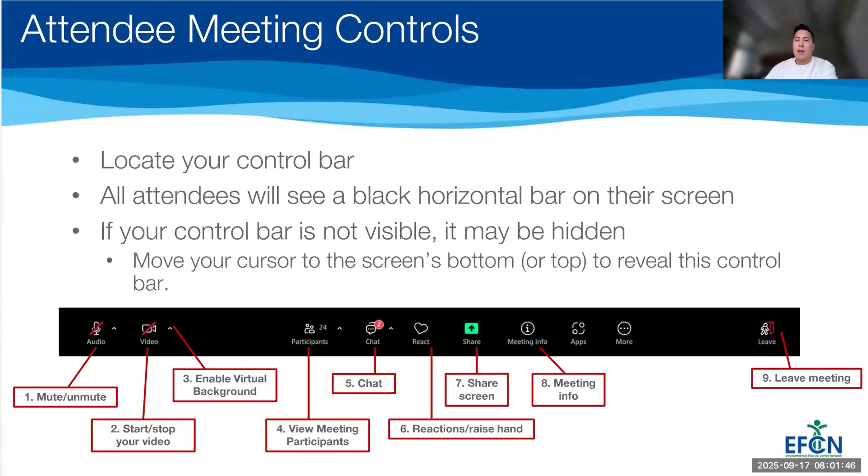These trainings are based on the Water Professionals International ABC operator certification. This is a pretty standard guide used to assess wastewater operators. Many of our topics are specifically aimed at helping you pass your wastewater operator level 1 and level 2 exams. If you want more information about this exam, it can be found on the Water Professionals International website, under the wastewater operator section.

To answer that question, here's a broken manhole. The first answer is that, like with any wastewater infrastructure, as use goes on, that infrastructure tends to degrade over time. It wears away, things get old, things break, parts get lost, and so on.

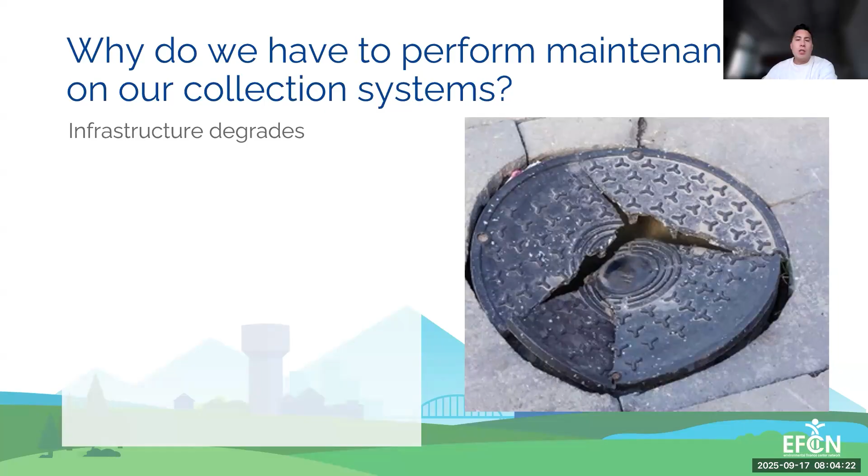But also, specific to our collection system, many users treat the things they flush down the drain as out of sight, out of mind. People don't really think about what they flush. We've seen wipes, trash put down toilets, rags put down toilets—all kinds of things.

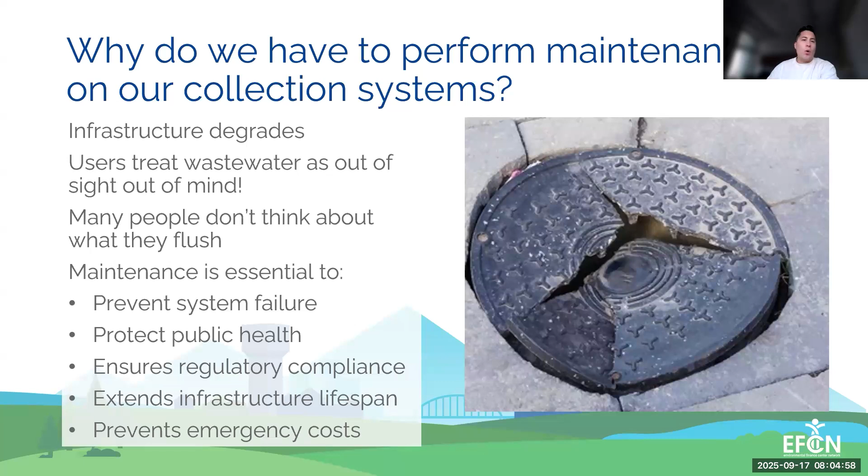Because of this, our collection systems need constant attention—both preventative and corrective maintenance. All of these are required to make sure our collection systems do not fail. They ensure we do not have overflows and that we protect public health. Maintenance also ensures we meet our regulatory requirements and are not violating based on overflows or a lack of maintenance.

Maintenance also helps extend the life of the infrastructure that we build and that our users pay a lot of money to access. And if we have good, strong maintenance schedules, we can prevent unnecessary emergency costs. Emergency costs are going to come up no matter what; however, a good maintenance program can prevent excessive and unnecessary emergency costs.

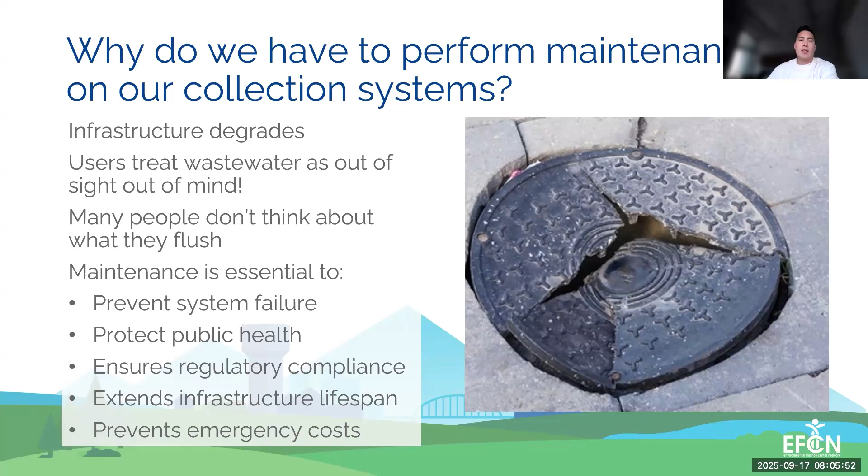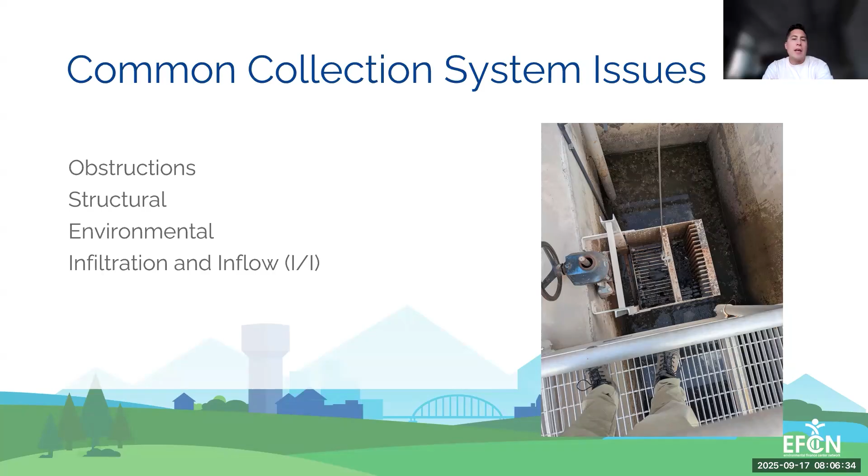So the first thing I want to talk about is some categories of the most common collection system issues. These are the ones that maintenance target, and we consider 4 categories: obstructions, structural issues, environmental issues, and infiltration and inflow. Now, these categories can intersect, and infiltration and inflow is typically a result of the others. But in our next couple of slides, we'll go into more detail of what each of these are specifically, what they are in a vacuum, and then what problems can result from these issues if they are left unaddressed.

So the first thing I want to talk about is obstructions, and for this slide specifically debris, because there are a couple different kinds of obstructions that we take into account. Debris can be incidental, because sometimes our users treat the wastewater system as out of sight, out of mind, or more commonly like a trash can. The mindset is, anything that goes down there belongs down there and it's gone for good. So debris is classified as any unwanted solid material that enters the wastewater collection system and can obstruct or impair the flow.

Examples of this would be trash, which would be rags, wipes, which are marketed as flushable, but they're not, and so that's why rags and wipes are kind of notable. Plastic, rubber, paper, that kind of typical trash products. Everybody I know who works in wastewater knows there's tons of rags in the system, but I've never quite found anyone who knows how they get there exactly. But they're always there. That shows the ubiquitous, omnipresence of trash in the collection system, because for some reason stuff always gets in there.

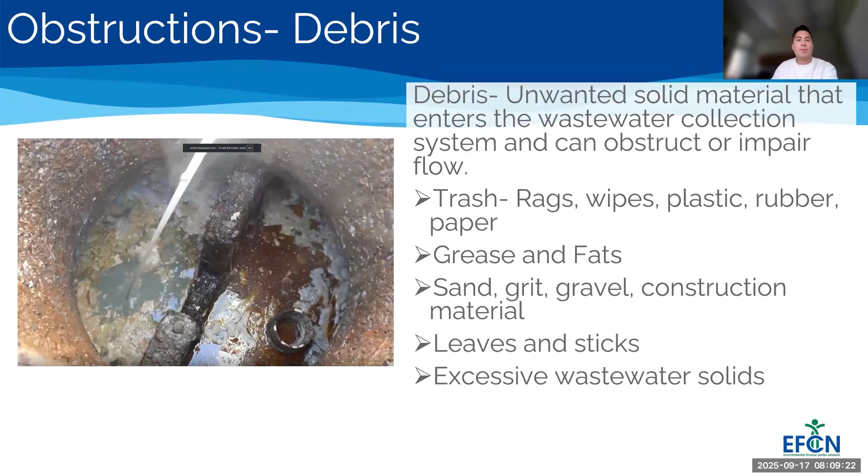Now, the second obstruction I want to talk about are root intrusions. Root intrusions happen when tree or other types of plant roots grow into the pipes of a collection system. Roots enter through small openings, such as cracks, broken joints, or poorly sealed connections. Now, just the basic biology of roots is that roots tend to, and why they become such a problem, and why they're ever present in our collection system, is that roots tend to gravitate towards weak spots in the pipe that are either already leaking,

or they have condensation, so those plants naturally seek out that water and collection system infrastructure, making it the perfect target for that behavior where they're seeking them out due to those leaks and condensation. Now, once they breach that infrastructure, they can grow quickly, because the environment is moist and full of nutrients. As they grow and expand, that can make those issues of them growing in the system worse, and they can even act as sites for other debris to cling onto and accumulate.

Now, roots are more likely in certain conditions. This is typically going to be such as old and deteriorating pipes, which are more likely to have existing cracks and joint failures. There's also clay and concrete pipes, which are more likely to have weak points that are more susceptible to root penetrations than more modern pipes, such as PVC and HDPE. And then one more is dry soils. Typically, those dry soil conditions can cause plant roots to grow more aggressively in order to locate moisture as well.

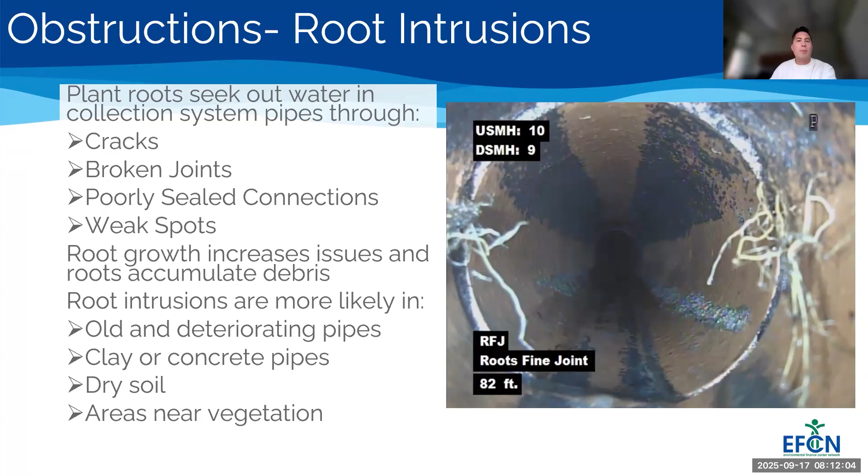So those are the two kind of obstructions that we're going to talk about. Now, the issues that they can cause—both obstructions are a concern because they can cause a range of different operational and environmental issues.

Obstructions can cause blockages and backups, which are known as sanitary sewer overflows.

Debris specifically is known to cause pump damage, as those solids, like the grit, rock, and pieces of trash that are really sturdy, can damage impellers or clog pumps, which can lead to mechanical failures and costly repairs in the system.

Now, both debris and root structures can lead to reduced flow capacity, as obstructions in the system tend to narrow the pipe diameter, which can reduce the hydraulic capacity, increasing the risk that those pipe sections can have overflows during peak flows.

Also, frequent obstructions can lead to increased maintenance costs due to the frequent need for cleaning, jetting, and emergency responses, which can drive up operational costs.

And then the final issue with obstructions is broken pipes. This is mainly due to roots, which grow in there, and as they grow, they make those cracks wider and cause collapses and stuff like that.

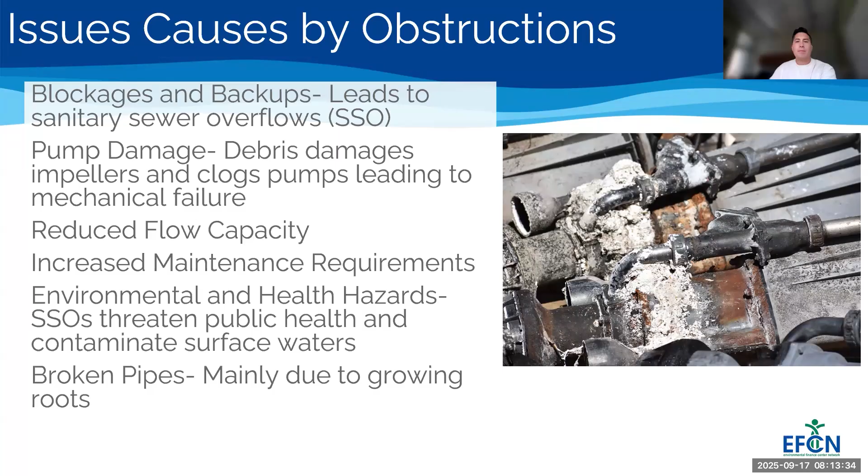So how do we address those obstructions? A lot of times this is done through routine cleaning—things like hydrojetting, where high pressure water is used to clean out debris; mechanical rodding, where you have a rotating cable with cutting tools that can scrape and remove buildup; and vacuum trucks, which can be used to suck out debris from those manholes and basins where obstructions collect.

Then another way of addressing obstructions is frequent inspections. You can use closed circuit television, or CCTV, cameras that you send through the pipes to locate and assess blockages to create more direct cleaning. This type of inspection can help determine if cleaning or repairs are needed.

Then there's also public education. If you inform your users about some of the dangers of blocking the sewer system, that can possibly help reduce the flushing of non-biodegradable items or improper grease disposal as well.

Now, specifically to address root intrusions, you use things like mechanical removal, where you use root cutters attached to rodding machines or jetters that are physically designed to cut and remove roots.

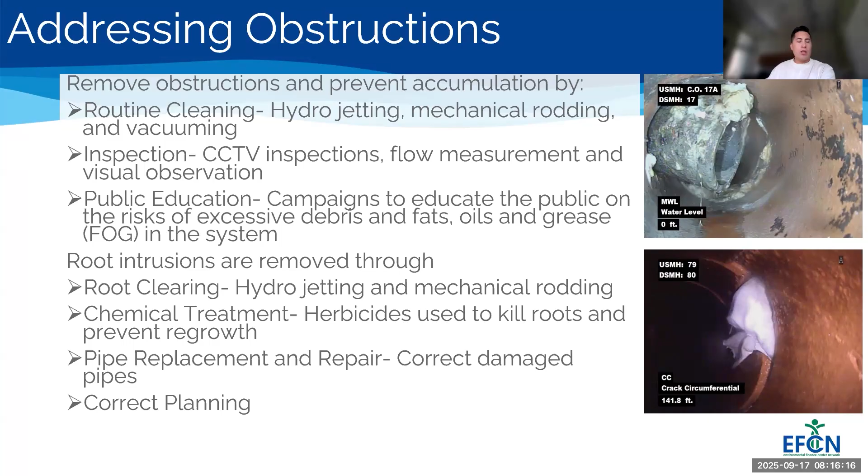Now, the next issue that we run into a lot in our collection systems are structural issues. Structural issues in sewer systems are problems that affect the physical integrity of the pipes and related infrastructure. Just like obstructions, these issues can lead to system failures, environmental hazards, and costly repairs.

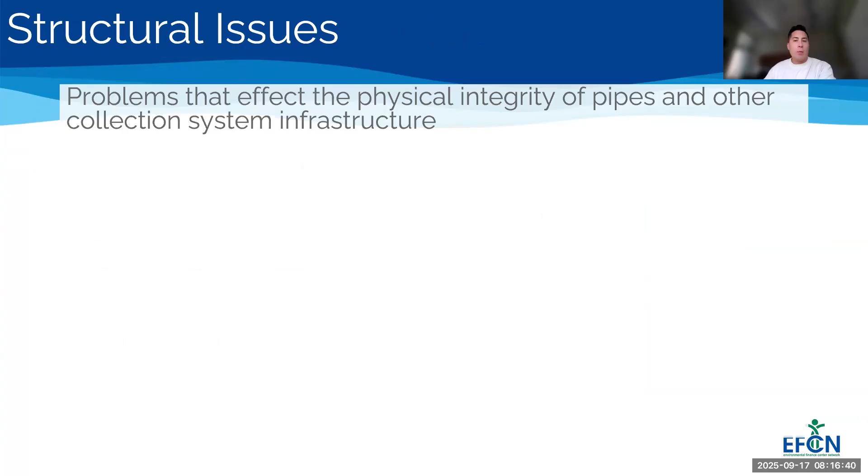Some examples of these include cracked or broken pipes, which develop due to age, ground movement, external loads like traffic, freezing and thawing during seasonal changes, or root intrusions. Cracked pipes tend to allow infiltration of groundwater or exfiltration of sewage, which can lead to environmental contamination and reduced pipe capacity.

Then the next type of structural issue is collapsed lines. These are essentially the advanced forms of cracked and broken sections of pipes. A complete or partial line collapse can result in increased flow obstructions and even complete blockages.

Another similar type of structural issue is deformed pipes. These consist of deformities that change the original shape and size of sewer pipes, like buckling, bulging, or swelling, which can be caused by improper installation, shifting soils, excessive surface loads, and environmental factors like thermal expansion—again, that seasonal change.

Obstructions like root intrusions tend to aggravate deformities found in pipes. One specific type of deformed pipe we run into a lot is line sags, which create low points in sewer lines. They create a perfect storm of issues where you have hydraulic problems due to backups, areas where debris can accumulate and slow down flow, and these come together to cause overflows.

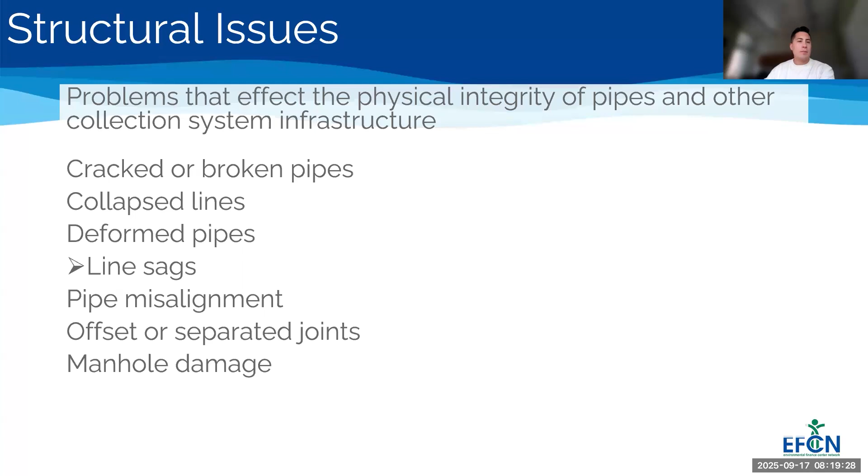This is specifically what one of those types of issues might look like, a pipe sag. As you can see, it's kind of a dip in the ground where water settles and debris settles as well. This has to be cleaned or else it can get worse.

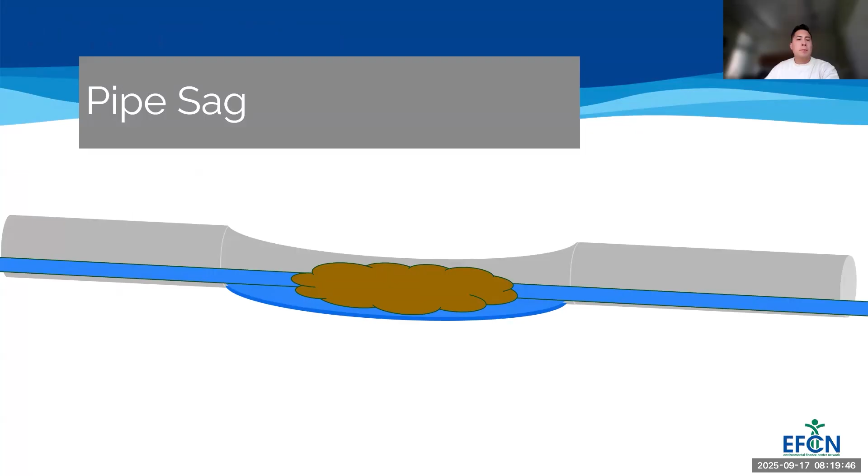The next type of issue will be environmental issues. Environmental issues in the sewer system consist of chemical and biological issues that are typically the result of untreated waste or poorly managed sewer systems.

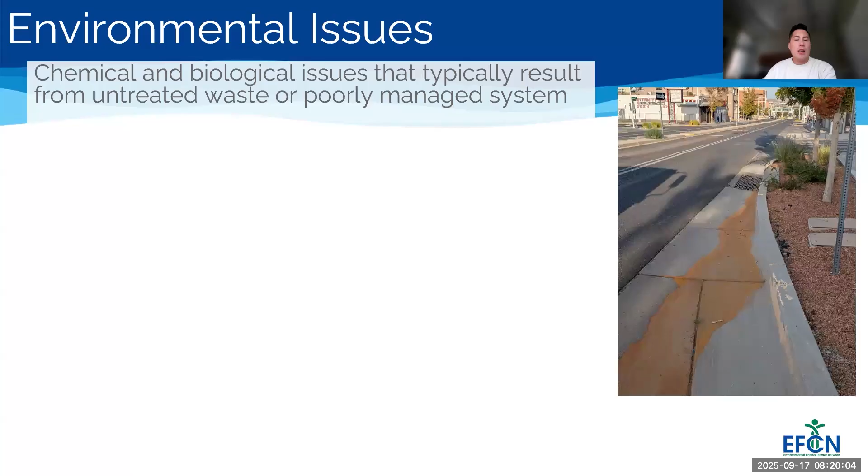Examples include things like corrosion, which can be caused by sulfuric acid, which forms in anaerobic environments because microbes use sulfates when oxygen is not available. That creates hydrogen sulfide gas, which can create hydrogen or sulfuric acid at the top of sewer pipes, especially when that hydrogen sulfide comes in contact with moisture. When it occurs at the top of a sewer system, it's called crown rot.

Something similar are odors, also the result of microbial activity. Gases that are frequently a concern include hydrogen sulfide, which smells like rotten eggs, and ammonia, which is a strong irritant and can be toxic and even deadly at higher levels, the same for hydrogen sulfide. Then there's also methane, which tends to be an odorless gas, even though I'm bringing it up with odors. But the reason this is a concern is because it's a gas and it's highly combustible.

The last environmental concern is sanitary sewer overflows, which we've touched on in a couple of our slides, but should be considered an environmental concern as this exposes the public and the environment to untreated wastewater. This is harmful because it can lead to the contamination of surface waters with toxins and excess nutrients. It can increase the exposure of disease-causing pathogens, and is harmful to wildlife, especially wildlife that lives mostly in those surface waters.

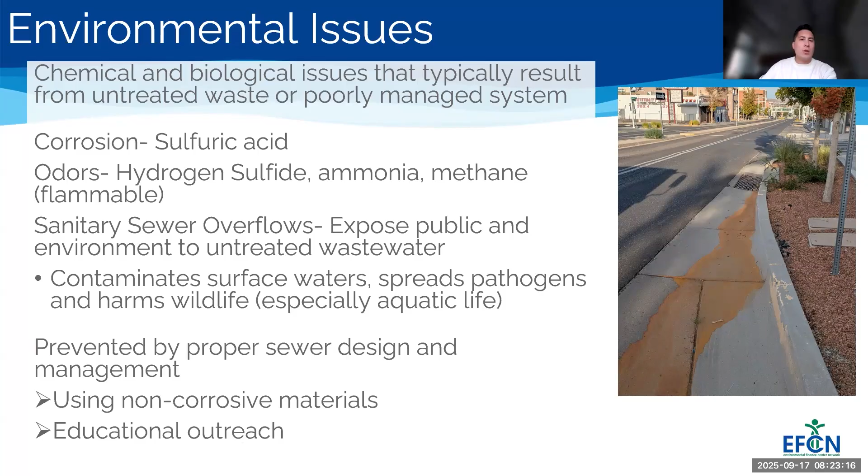The next issue, the last one in sewer systems, is inflow, which is when water flows in from open areas. This could be rainwater or storm water, and it's water that inflows from manholes and other types of connections open to the environment.

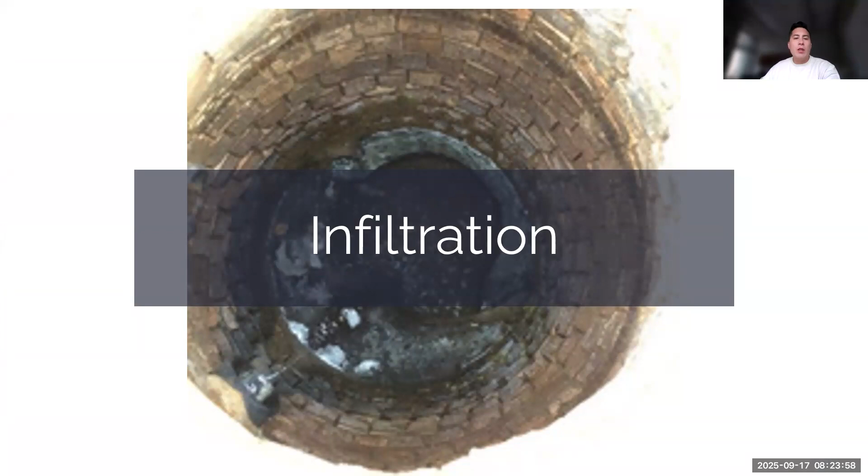Then there's also infiltration, a similar concept, but it's groundwater seeping in through the pipes. This picture is a little blurry, but I'm showing some older infrastructure made from bricks, and water is leaking in from all sides of this manhole. Both of these are issues because they can cause hydraulic overload at the wastewater treatment plant, and they should be limited whenever possible.

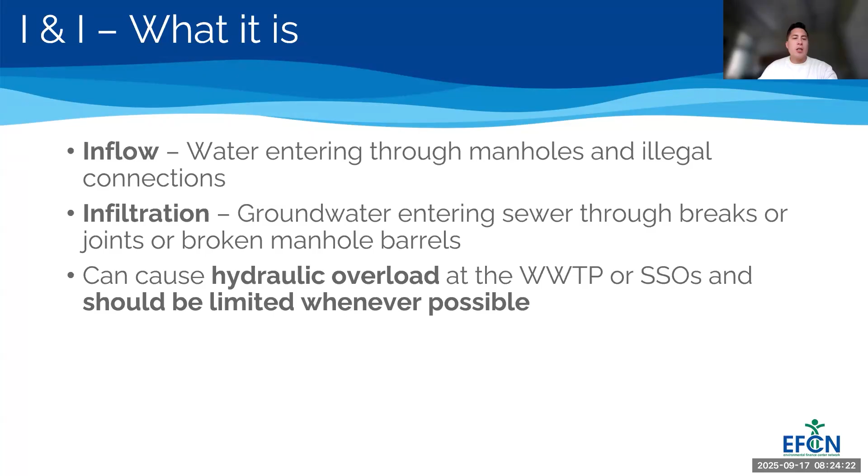One other way inflow can get into the sewer system is through illegal connections, where someone builds something in and doesn't get the right permit to access the collection system, which tends to cause things like inflow.

Now, in order to deal with inflow and infiltration, you need to have a good program that identifies these issues.

Some of those methods include late night surveys, where you check manholes to see if clear water is running during hours when people are most likely not awake and using the collection system, like 2 to 4 a.m. If you have a bunch of water coming through, it's likely coming from a source other than domestic areas, especially if it's clear water.

There's also the CCTV inspections that we mentioned, so kind of just sewer videoing lines.

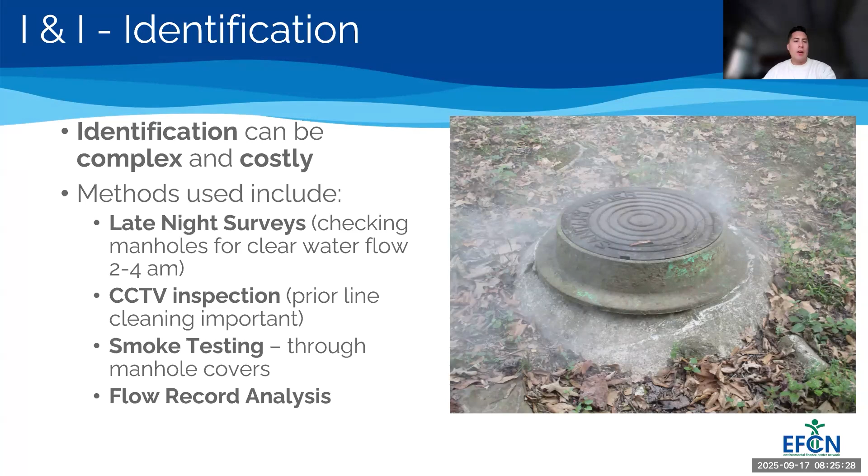Now, there are a variety of methods to contain I&I. These are mostly expensive because a lot of times you need things like a full pipe replacement. You replace sections of the pipe through things like slip lining or pipe bursting. You may use chemical grouting to patch it up, or improve your storm sewer system to make sure that excess water is not around that can collect in the sewer system.

These types of services often require outside contractors and specialty knowledge, so systems tend to have to pay for that to make sure that they can get it.

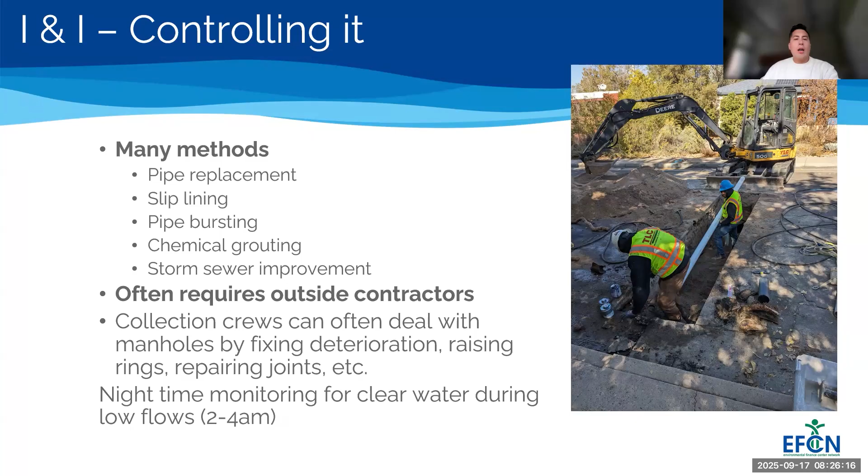So those are all the issues that we tend to see in the collection system. Now our next section is going to cover how we actually look for them. This section is about collection system monitoring. We'll talk about a couple ways and strategies that systems typically use to monitor the collection system and identify those types of issues.

So the first are visual inspections. Visual inspections are a critical part of monitoring our sewers. They involve visually assessing the condition of sewer pipes, manholes, and related structures to identify defects, blockages, structural damage, and other issues that can affect system performance or public health.

The first and easiest type of visual inspection is inspecting surface conditions. By looking for signs of overflows, sinkholes, pavement cracking or deformations, and unusual wet areas, these can all be indicators that leaks or water is settling where it shouldn't be, and that what's going on underground is affecting what's going on at the surface area.

Another example of above ground observations is things like odors, because that can also indicate something is going on incorrectly below the surface, even though that wouldn't be categorized as a visual inspection.

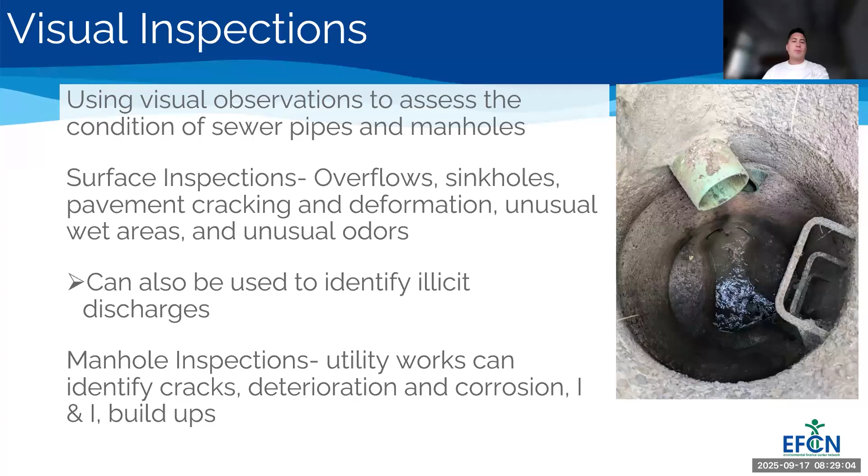The next type of monitoring tool that I've mentioned a couple times is closed circuit television. Here I can explain a little more what it is and show some examples. So closed circuit television, known as CCTV, refers to the use of specialized video cameras in sewer systems to inspect the interior of sewer pipes and manholes.

CCTV is used to inspect the interior of pipes for cracks, blockages, root intrusions, corrosions, and structural defects. It's typically the most effective way to directly observe what's going on inside those underground collection systems. Current CCTV practices also provide video documentation for condition assessment and maintenance planning.

So what this process typically includes is deployment of the video equipment, real-time observation, and likely video recording of the activity or movement of the CCTV camera through the pipe. Then there is some reporting, during the recording process, you take notes that can indicate where defects are, when they are, and what type of defects they are. These are usually given as codes used throughout the contractor providing the CCTV, and they use those codes to create reports.

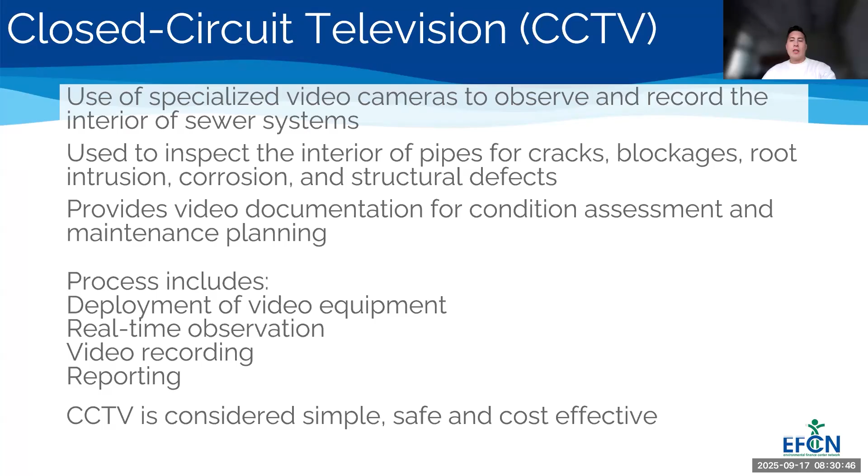It is considered a simple technology to use. It is safe due to not requiring entering confined spaces, and it can be very cost effective, especially when you've already made those kind of upfront commitments to the infrastructure of using CCTV.

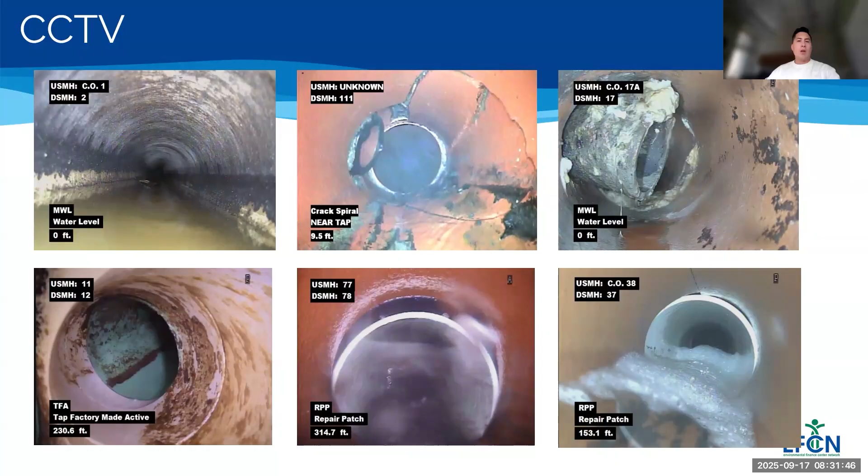The other type of monitoring technique we want to mention is flow monitoring. This is the process of measuring the rate and volume of wastewater moving through a sewer system and the pattern that forms. It helps utilities understand how the system behaves under different conditions and helps identify unusual flow patterns to determine problems like blockages, infiltration, or overflows.

It is typically done by installing a variety of flow meters and level sensors in strategic locations to track things like flow rates, peak flows, diurnal patterns. A lot of times when you monitor flow for issues, those issues are identified based on the presence of sudden spikes, drops, or surges of flow. Those can be identified as things like inflow and infiltration, blockages, and hydraulic bottlenecks as well.

This can also be done with ultrasonic, area velocity, and weir flow meters. Those are the common types of meters or sensors used. Typically the data collected is recorded and transmitted to a central system, such as a SCADA system, or it can be downloaded manually. Now, a lot of advanced systems have begun using AI that can analyze irregularities and even recommend areas to inspect directly through CCTV. So it's kind of an ongoing field that's improving and becoming more of a useful tool.

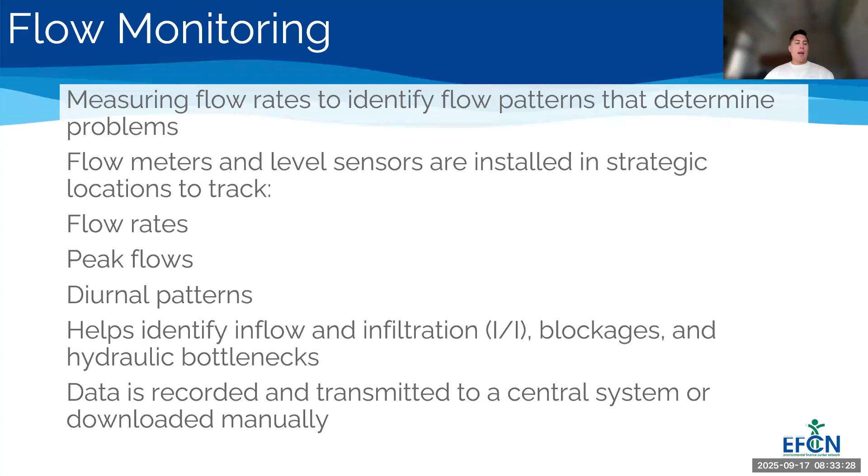We also have smoke testing, which I mentioned in the I&I section. Smoke testing is a method used to detect defects, illegal connections, infiltration, inflow, things like that in the sewer collection system. As you can see, this process involves blowing non-toxic, visible smoke into the sewer lines and observing where the smoke escapes. This is accomplished by attaching a smoke generating machine to a manhole or cleanout to force that smoke into the sewer system. Smoke either travels through the designed sewer pipes exclusively, or it can travel through openings that are not part of the original design.

So using sewer maps or knowledge of the sewer system, workers can walk through the area and look for smoke escaping from things like storm drains, yards and lawns, building foundations, roof vents, and cracks in the pavement, which is some of the examples shown here. These are just lawns and buildings, but you can see the smoke coming out of the ground where it wasn't supposed to, which indicates there are cracks and leaks. This may be the site for I&I, and once you use this kind of test, you can follow up with things like CCTV to establish if there are full collapses in the line.

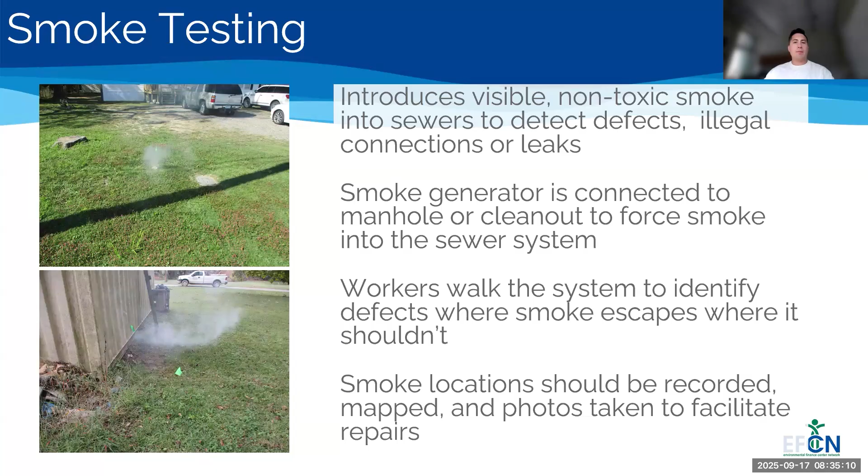Some other quick inspection methods are things like dye testing, which is used to trace flow paths and confirm that suspected cross connections or infiltration sources are present. This helps for locating unwanted cross connections. To do this, utility workers will pour or inject non-toxic dye into a fixture, storm drain, roof spout, or even a surface area, and observe if it flows into the collection system where it should not. This is important because it can confirm those extra sources of flow that contribute to hydraulic overload and pipes exceeding their design capacity.

Another popular technology that's increasing in popularity is acoustic inspections and sonar inspections, which are non-invasive methods that rely on sound waves to detect things like blockages, sediment buildup, and structural changes inside sewer pipes. Those are a great tool when you have limited visual access to the pipe.

In this type of technology, they use a special microphone and sound transmitter to send sound waves through the pipe to measure how much sound is blocked or absorbed. So if you have a speaker upstream in a manhole and a receiver downstream, and you create sound waves, and there's a low sound return in that microphone, it indicates there might be a blockage in the system.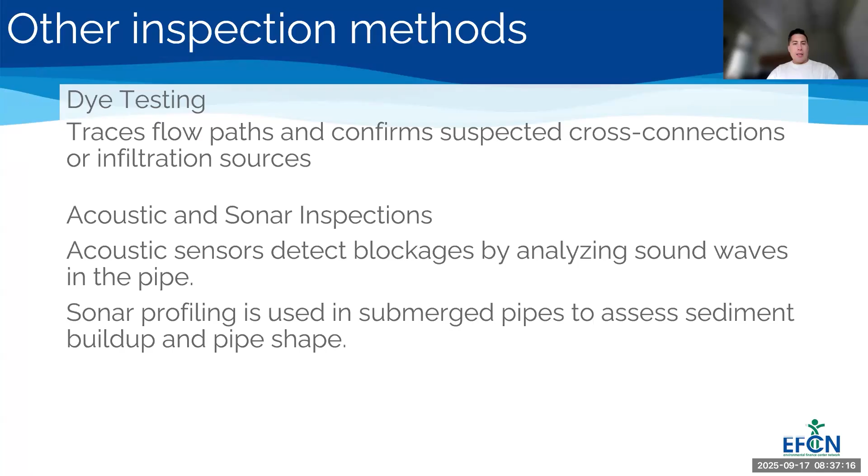So we've talked about what type of issues we see in the collection system, and we've talked about how we inspect for those issues. So let's talk about how we actually can correct or address those issues.

To address obstructions, this is kind of just the same kind of slide. You have your routine cleaning, your inspections, public education, and that's for all obstructions, especially debris. Then for roots, you have your hydrojetting and mechanical cleaning, which is how you clear roots. You have your chemical treatment, and then you have your whole pipe replacement and repair.

So I just wanted to retouch upon that and show some of the debris and what a collapsed pipe might look like from CCTV.

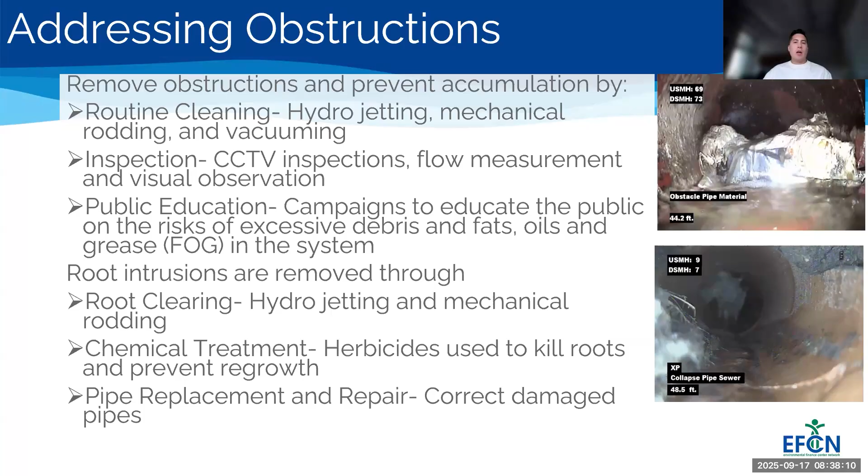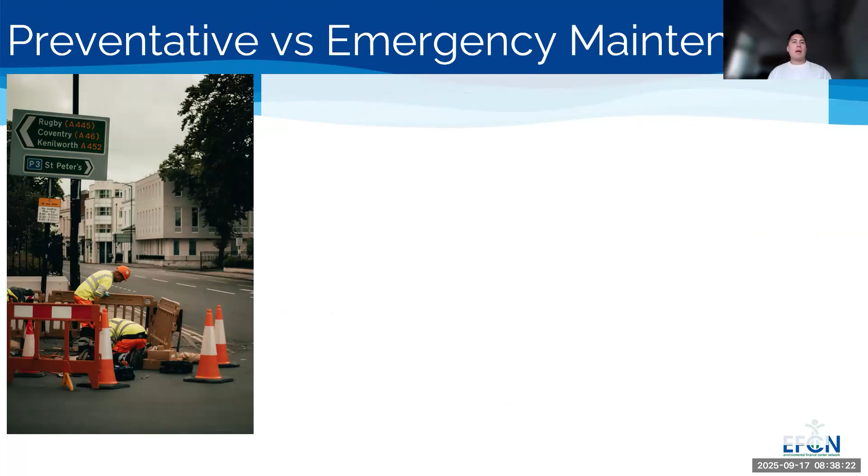Before I get into more maintenance, what I want to talk about is the idea of the different types of maintenance that we might perform on a collection system. These two types are preventative and emergency maintenance. Preventative maintenance is defined as scheduled, proactive work aimed at reducing the likelihood of system failures and extending asset life.

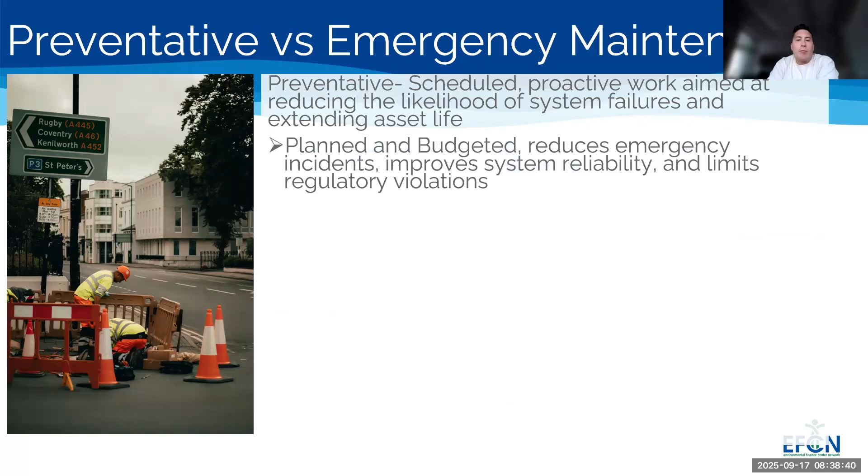Some characteristics of this type of work include that it reduces emergency incidents and long-term costs. It improves system reliability and regulatory compliance.

Some examples of preventive maintenance would be things like routine jetting and cleaning of sewer lines to prevent blockages, scheduled CCTV surveys to identify cracks, infiltration, or root intrusion, grease trap inspection programs for food producers to help prevent FOG buildup, pump station checks to ensure pumps and floats are working correctly to avoid backflows and backups, and finally manhole inspections to identify structural issues and I&I control.

So those are the examples of preventative maintenance. And then you also have emergency maintenance, which is unplanned, reactive work that tends to be performed in response to a failure or urgent issue that poses a risk to public health, safety, or the environment. Some characteristics of this emergency work is that this type of work tends to happen suddenly and without warning.

It is typically more costly than preventative maintenance due to extra labor, including things like overtime, extra equipment usage, and sometimes even regulatory fines. Emergency work can also be disruptive to normal service or operations, and a lot of times is even due to a lack of regular proactive maintenance.

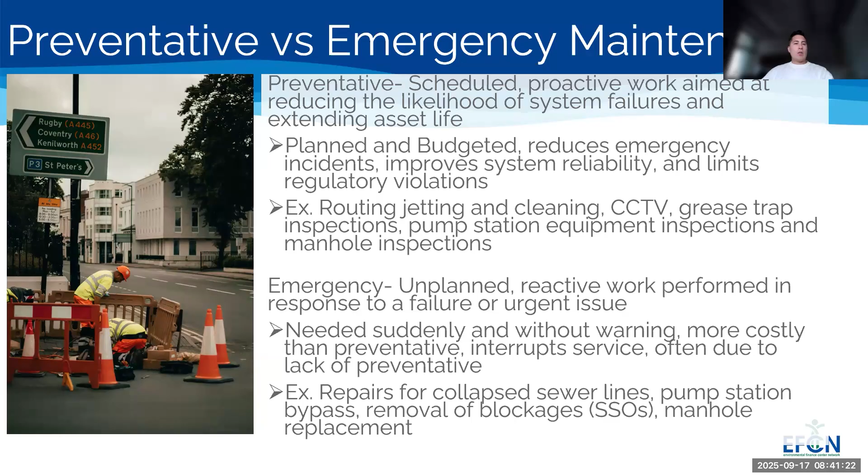Now, some of those types of maintenance we'll go into now. The first one is jetting or hydraulic cleaning. High pressure water jetting, which I have mentioned, is known as hydraulic cleaning in sewer systems, is the process or method used in sewer systems to remove debris, grease, sediment, and other blockages from the sewer lines using those high pressure water jets. It is one of the most common and effective techniques for keeping sewer systems functioning properly.

This process utilizes typically a specialized truck or vehicle attachment, which we would call a jetter or combo unit, that is equipped with a water tank and a high pressure pump. That pump is attached to a hose and a nozzle, which is inserted into the sewer line to break up blockages. This is possible because these nozzles deliver water at a high velocity with pressure typically between 1,500 and 4,000 psi.

There are many different types of these special nozzles, but for the most part, they fall into the category of pushing water forward to break up blockages, or backward to propel the hose and flush debris. Some hoses push water outward to scour the sewer line and get rid of buildup accumulations of obstructions that can build up on and coat the inside of pipes.

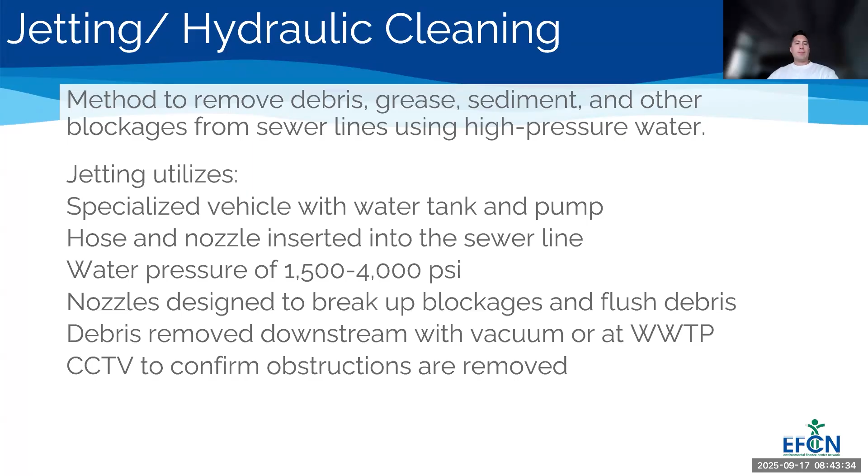Finally, after cleaning, CCTV should be utilized to verify that pipe conditions are good and ensure that all obstructions have been cleared. This is an example of what those nozzles may look like. As you can see, you have water pushing forward and water spraying backwards in both of these instances. So those are some of those specialized nozzles.

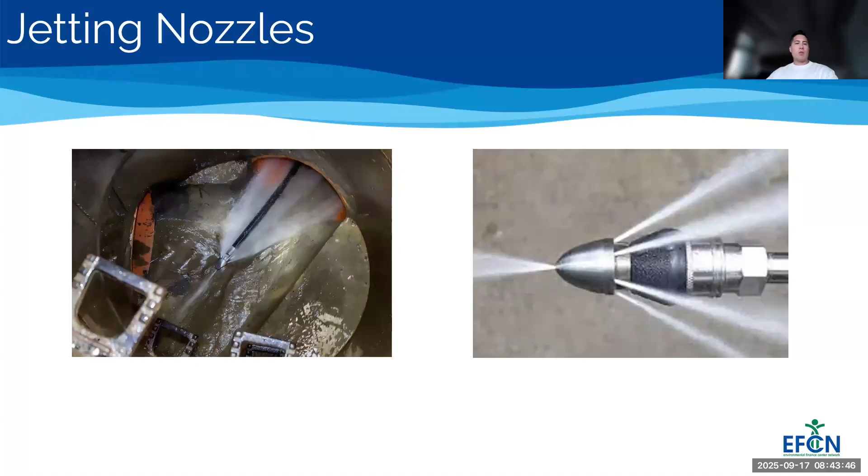Similar to this, we also have mechanical cleaning. Mechanical cleaning in sewer lines are methods to clean sewers by physically scraping, cutting, or pulling debris out of the sewer pipes using specialized mechanical tools. The most common example of this is rodding, which uses steel tools that rotate mechanically or by hand.

Now, these can be either electrical and powered by machinery, or they can be hand rodders, which are typically used to access difficult lines. A lot of times, this can also be combined with jetting technology to flush the debris that's cut away.

Jetters you insert downstream and move them upstream, against the flow of water. For rodding, you typically direct them upstream to downstream so that you don't push up and cram debris more solidly against flow.

Two other examples of mechanical cleaning would be things like pigging or bucket machines. Pigging uses snugly fitting, typically giant plastic or rubber or inflatable tools that also scrape the sewer and pull everything along the sewer until they can be pulled to a manhole where they can be removed. Buckets work similarly, but it's a bucket that's being pulled by a cable through the lines.

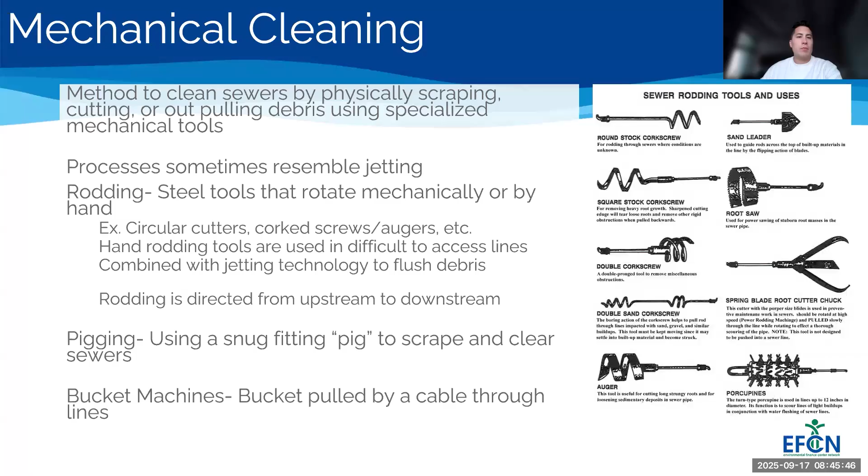The next form of cleaning that we tend to see is things like chemical cleaning. Chemical cleaning uses chemicals designed to target grease, roots, scale, or organic buildup to remove them from the sewers. This is typically applied by pouring, spraying, or injecting chemicals upstream of the blockages, and then collecting them downstream, or monitoring to make sure they don't upset the plant.

Examples of this would be things like degreasers, root control, those foaming herbicides that we mentioned, descalers, biological enzymes. A lot of times these can be effective for difficult areas, and are gentle on sewers and should be taken care of when using these so you don't contaminate the environment or put individuals and users in harm's way. A lot of times these are used in combination with mechanical or hydraulic cleaning because you use these to soften up grease or soften up biological hazards.

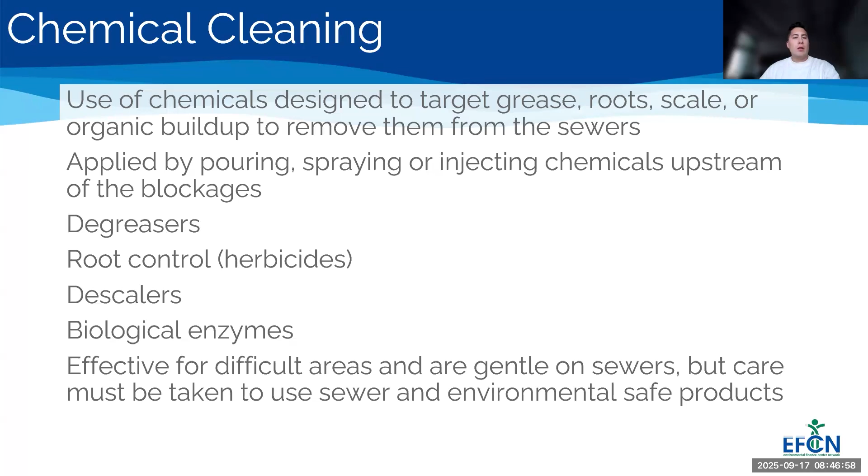So those are the main forms of cleaning, but we do have different things that need to be cleaned up. Some examples of this are things like fatbergs. These are large obstructions that result from fog, or fats, oils, and grease, and typically are heavy from food producers.

They are typically removed from a combination of standard cleaning techniques, like we've talked about: chemical, jetting, rodding, vacuuming. Now, in older systems, really large systems that have been accumulating grease for years, sometimes they even require divers to jump in and clear out these types of obstructions.

The most effective way that people find to address fog or grease bergs in your system is to have an effective fog program that includes things like monitoring and enforcement and installing the correct infrastructure. I will talk a little more about that in a bit.

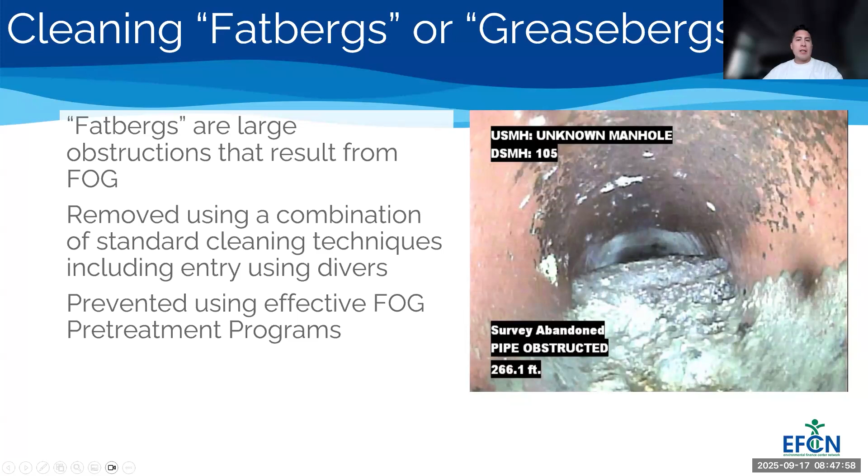So those are the forms of inspecting and cleaning. Now, in the event that the collection system completely starts to fail, or it's becoming more problems than those inspection or cleaning methods are worth, you would have things like a full repair.

There are a couple different types of repairs that are used. There's your typical traditional excavation and open cut repair, where you excavate the ground, remove the pipe, replace it, and ensure correct bedding so it doesn't shift, and you have a brand new pipe in place.

Some modern ways of replacing pipe are things like cured in place pipe, pipe bursting, and slip lining. For cured in place pipe, you put in a liner that is resin saturated, and allow it to cure in place to put a new pipe in the old one, which tends to work when you have an oversized pipe and room to decrease the capacity.

Pipe bursting and slip lining are similar. With pipe bursting, you have a big metal head that breaks up a pipe as you pull it through and replaces it using the old pipe as a guide, with a new pipe pulled behind it. Slip lining is similar, except you drill through it and insert a smaller pipe into an existing one.

For pipe repairs, you can also have things like fiberglass or resin patches, which are applied internally to stop obstructions from spreading and give you a little more lifespan for your system in those segments.

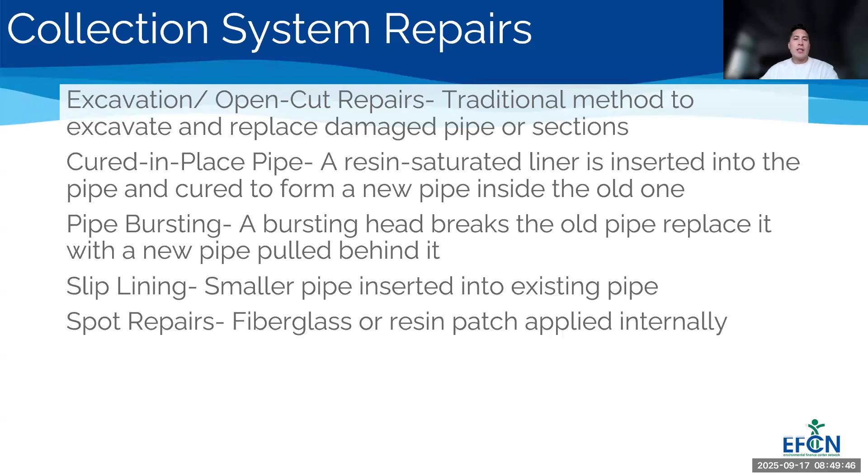This is what pipe bursting might look like. You have that big, long black pipe that's going to follow the metal head. Then you have slip lining, where you have a saw device that cuts up the bigger pipe and allows you to install the smaller one inside it.

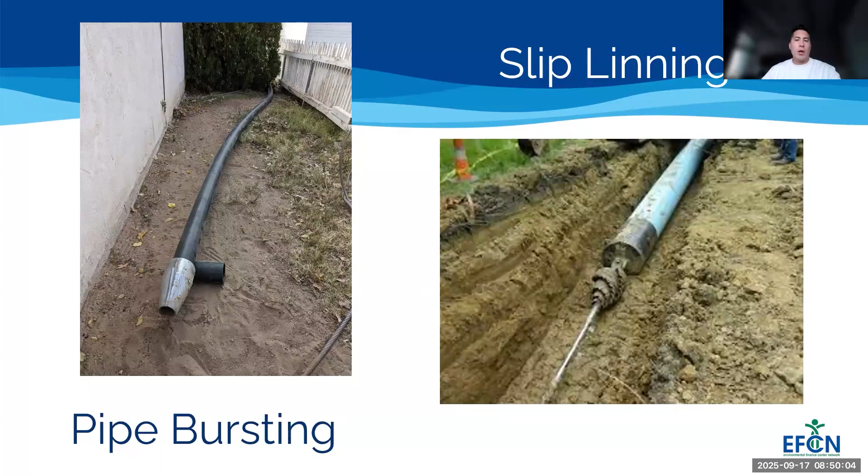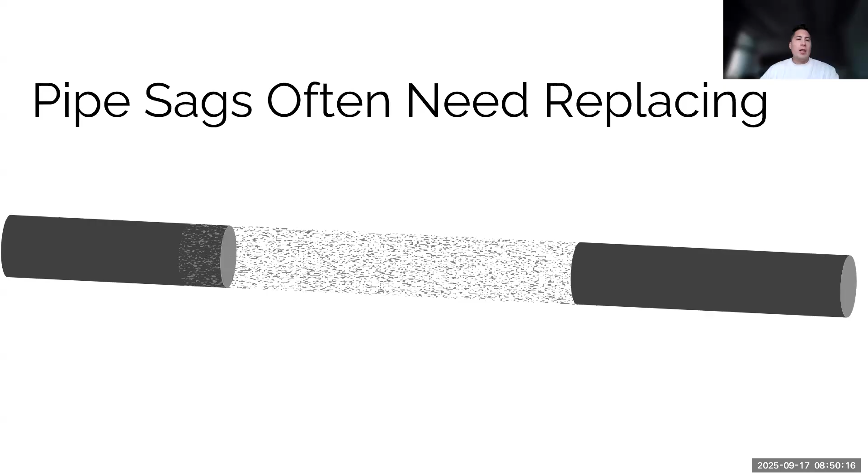We mentioned earlier our pipe sags. In this instance, you would need to replace that pipe. So you clear the debris, remove the section, and add a new section where flow is allowed to proceed.

In these types of replacements, a lot of things require trenching. We've mentioned excavating a bit, and I'm sure many of you are familiar with it, but I wanted to mention a couple details about using trenching for maintenance. Trenching is defined as the excavation, digging, or cutting of narrow channels for utility installation. The first step is planning, locating utilities, obtaining permits to do the digging, and providing traffic control if necessary.

You do the actual digging and dewatering to remove any water as necessary. Then, as you see in the picture, you may use shoring or trench boxes to protect your workers as they dig underground, avoiding any collapses. Once you have your trench dug, you do your pipe replacement and make sure you have sufficient backfill and surface restoration.

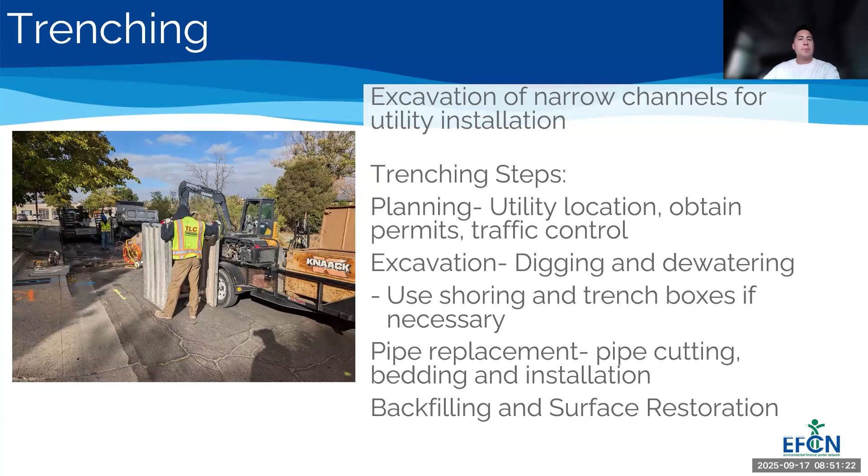Now, just like inspection, manholes can be a little unique to how these techniques are applied, but overall manhole repair is very similar to replacing other parts of collection system infrastructure. A lot of times these are easier to see when necessary, due to things like excessive deterioration, the need to increase system capacity, address safety hazards, or increased I&I.

Again, you assess the system. You prepare the surface by removing any debris, sand, or contaminants. You provide structural repair, which may require trenching or excavation again, or you may grout the cracks as a kind of patch. Then, for new manhole repairs and rehabilitation, you often want to add corrosion resistant material or lining to protect that infrastructure investment.

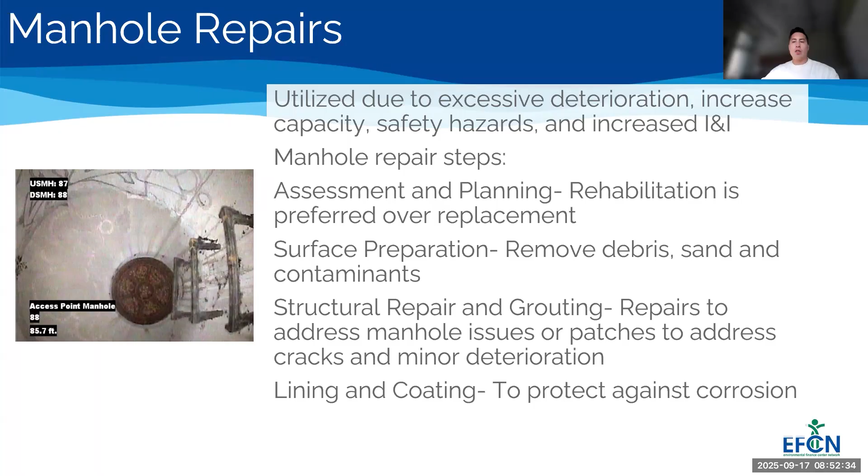When doing maintenance safety, it's important to have standard safety practices, similar to what we discussed in our previous two collection system sections, and similar to the hazards and safety practices seen in the rest of wastewater work. You have confined space hazards, which can lead to oxygen deficiency, toxic gases, and limited accessibility, so when entering confined spaces, make sure to communicate with other employees.

There's also things like traffic, which we touched on earlier, but you want to make sure you're using proper notification to the public so they don't run you over, and so they know not to walk over manholes or lines being used. Usually you use things like cones and signs to notify that.

You should be aware of those other common hazards associated with wastewater, like your physical hazards, and also the ability to be exposed to chemical and biological hazards. And because you're working around a lot of equipment, you also have the hazards from the electrical equipment that we use.

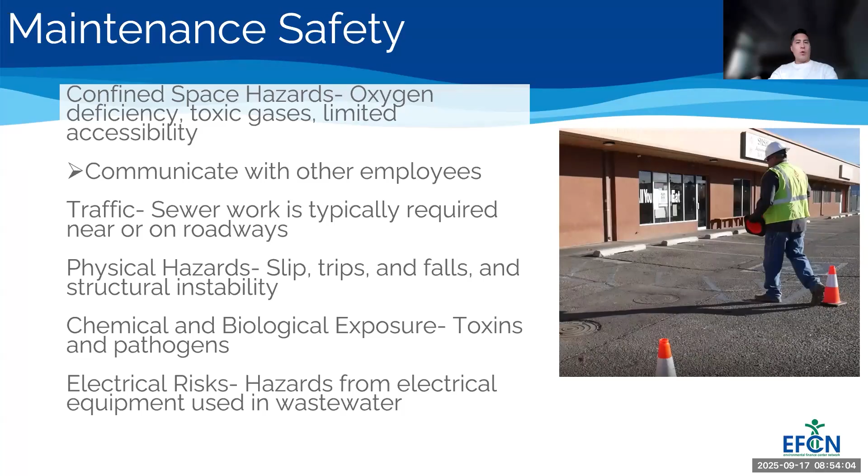Okay, so that kind of wraps up our section on maintenance, actually maintaining those when you have those issues in your collection system. The next thing we'll talk about is how you come up with a standard program, system, or plan to address your collection system maintenance.

So the first thing you want to do to maintain a system correctly and efficiently is have a maintenance plan or schedule. These are used to organize routine, preventative, corrective, and emergency maintenance, so workers know who's doing what and when it should be done. The schedule should prioritize high-risk areas to prevent blockages and overflows, and should be based on historical data of the condition of your system, age, materials used, and all the data you've collected throughout using the system.

These types of plans or schedules can be calendar-based, say scheduled based on regulatory or regular industry standards, or more condition-based where you're addressing each individual asset and deciding when that should be maintained. Also, these plans tend to determine communication procedures and data requirements.

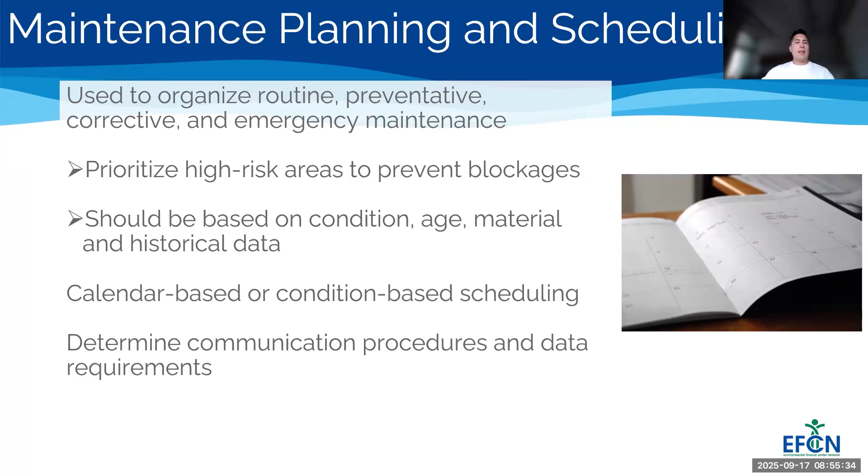So the next section will talk a little bit about the steps to creating a maintenance plan, and I'll provide a brief template for what goes into a written maintenance plan.

So the first thing that's always useful to create for a variety of different utility plans is your system overview. This gives the basic information for the system, like names, addresses, who's responsible for what. This can seem redundant or insignificant, but these tend to be really important when you're creating information that can be passed down to future workers and stuff like that.

Then you want to have as much information about the system as possible. This is where you would create an asset inventory, which would include things like an asset ID for everything in the system, location, pipe details, installation dates, last inspection dates, condition ratings, and connection components. A lot of times GIS and mapping systems tend to really help with this and show where and what is involved in the asset inventory.

Then there's the actual maintenance and inspection scheduling themselves. These will typically include the type that's going to be done, the priority level, the results of any inspection or maintenance, who's going to be assigned to them, and when the next activity will take place. For inspections, you also want to have recommended actions, plus photos and video evidence to show why things need to be done.

To go along with a maintenance plan, it's usually good to have a good work order system, which can provide task assignment, management, and tracking for your system. And a lot of times a work order system may be the bulk of the maintenance plan in general.

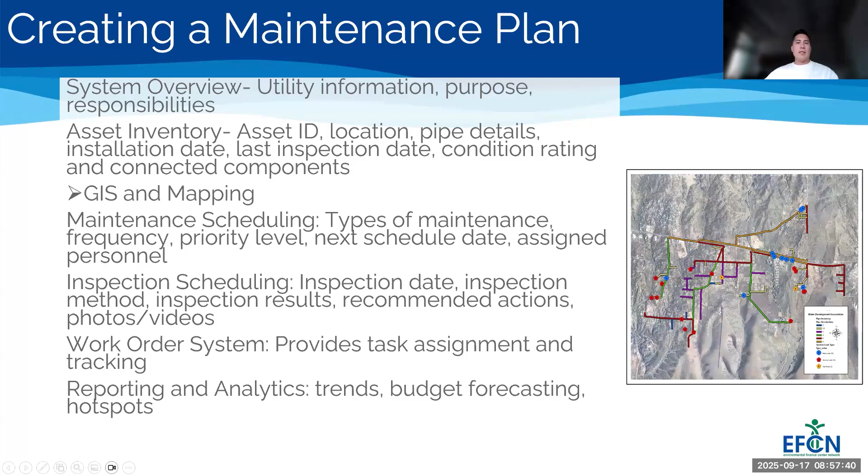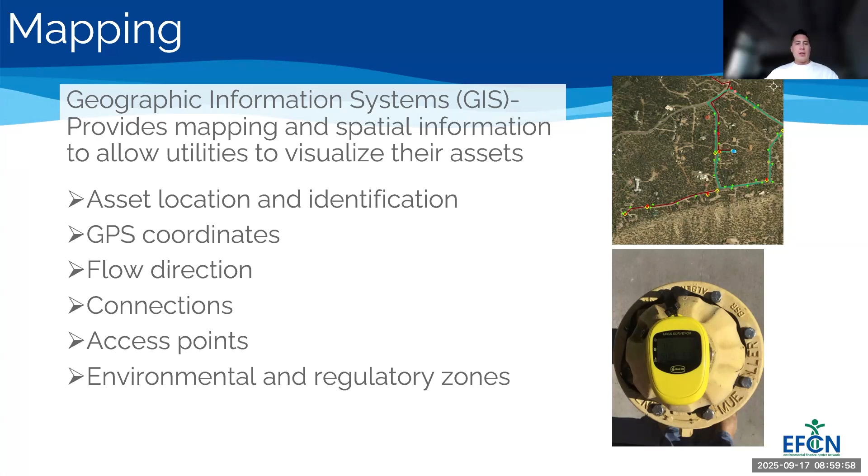The first is a FOG program. FOG programs are designed to specifically minimize the impact of fats, oil, and grease from food producers on the collection system. The components of a successful FOG program will typically address your FOG producers, where you would have them install things like grease traps, which are specific tools designed to trap grease at the top of these devices at the surface of the water so that grease can be removed.

You would go ahead and suggest best management practices for grease producers to follow so they minimize their grease that ends up in the system. And then there would be a documentation system so that they can make sure that they are disposing of those contents of those grease traps correctly.

Another good part of these FOG programs is public education. These are your typical cool it, cap it, toss it campaigns, which inform users of the dangers of FOG and how to best handle it by letting it cool in a can, capping that can, and throwing it in the trash.

You would also, in line with your inspection programs, be monitoring the collection system and nearby food producers to see if there's unnecessary FOG building up in the system. And then along with those programs, you typically have some enforcement that may issue violations and penalties and have compliance requirements for the food producers and stuff like that.

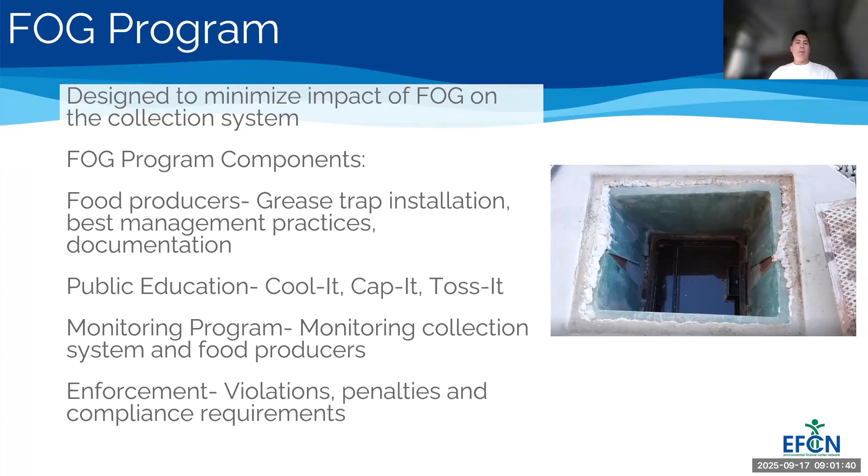The last thing I want to talk about for special programs is the SSO teams. A lot of times to properly document and plan your response and also notify regulatory personnel about SSOs, you want to have a whole team dedicated to that. This may be collection system people, wastewater people, monitoring and inspection personnel as well.

A lot of times you want to have a detection and notification system. This may be things like alarms in the system that notify your SCADA. This would include regular inspections to identify areas of the collection system that may be most at risk for SSOs, and then a system for the public to notify you when they recognize flow and overflows in the streets, which can be dangerous to them.

The type of procedures that would be involved would have containment of the overflow to make sure that it doesn't spread, cleanup to make sure that it's properly disposed of, and disinfection so there's no lingering pathogens in the SSO site. And like we've been talking about with a lot of this other stuff, data is super important for this. It can be utilized to create hotspots that may be most likely to have SSOs.